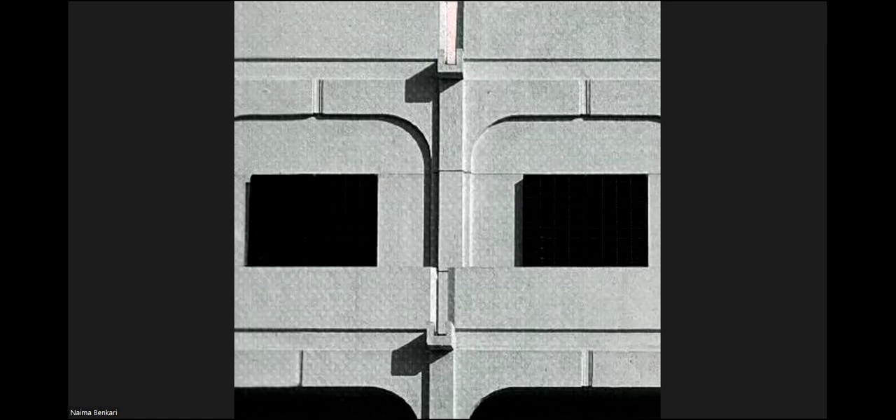Recording in progress. You can see the screen?

Yeah. Yes, it's clear. So moving on, and before I get to the basic examples, it is important to share the underlying discussions, the most important discussions, which is not easy in terms of, well, the court said find a way, but then how do you actually translate that into reality, and what are the challenges that really face such situations?

So the ancient temples that we are talking about, these are not archaeological sites. They have archaeological importance, but they're not archaeological sites. So it is difficult to freeze them. They're living monuments. They're living temples. It's difficult to freeze them in time like an archaeological site. So in reality, what are these big challenges that we're looking at?

Since these are living monuments, there is a continuation of the original function of the site, and that's really the legacy of such sites. These sites might have actually been around for even 2000 years, because there is reference in the early literature to these sites. So these have been part of the culture, the spiritual activities, the spiritual development of the entire region over centuries.

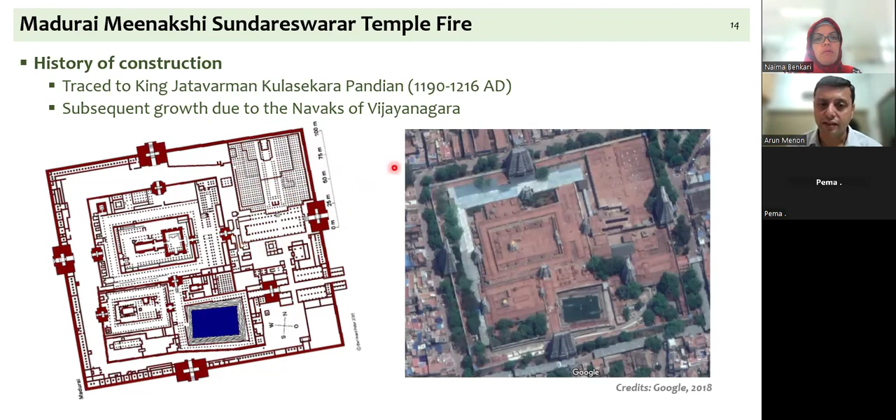I am going to focus on a structure that is, I hope you can see the pointer. You have what is called a hypostyle hall. It is called a mandapam. And this was damaged by fire. And you can see that it is sitting next to a very, very large complex. It's referred to as a 1,000-pillared hall, and it's a massive construction. It's sort of the pride of the place. It's a beautiful construction. The fire affected this location, but could have endangered this very famous construction as well. So that's the context. The name of the mandapam is Veera Vasantarayar Mandapam, in honor of a person by the name Veera Vasantarayar.

And the person was the brother of the king who was ruling at that point in time. So built in 1611. It's a hypostyle hall, and it's actually a multifunctional hall inside the temple. And today, not only this mandap, but also many other similar locations in the temple are used for multiple things. For example, a lot of shops selling products that are for the religious activity or otherwise were housed here, and the vendors would have to pay a small rent to the temple department to have their shops there.

And so you can actually see that a lot of the sculptural beauty of these spaces is obscured by the shops, but that comes from the fact that these were multifunctional spaces. So one night in this particular construction, after the shops were all closed, there are about 40 to 50 shops within this construction. What I'm showing you is a plan of the structure.

On a Friday night, since this is a temple dedicated to the goddess, Friday is an auspicious day, and on Friday night, after the affairs of the temple are completed, the shops are also closed, and there is a ritual that they carry out in each of these precincts where shops are present to remove the bad eye. They would just use a pumpkin with a camphor on it and show the shop this pumpkin and camphor, and

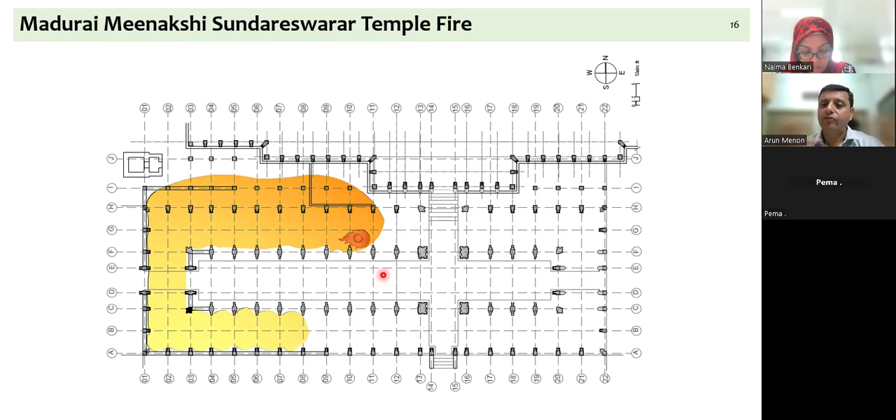And since the space was full of so much material, clothes and plastic and shops selling all this material, the fire went on for close to 5 hours. So we are talking of about 10:30 in the night to about 4 o'clock in the morning. The fire could not be curtailed. In fact, the fire department struggled to control the fire because of the amount of flammable material. And eventually, only after the collapse of the roof could the fire become less concentrated, and therefore they were able to bring down the fire here.

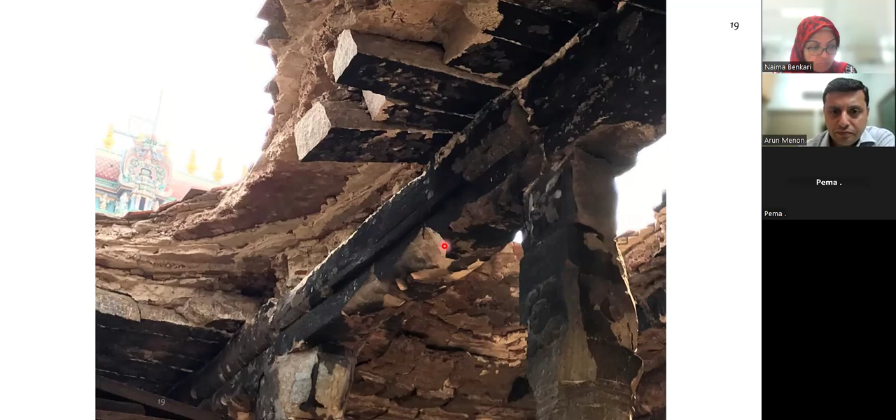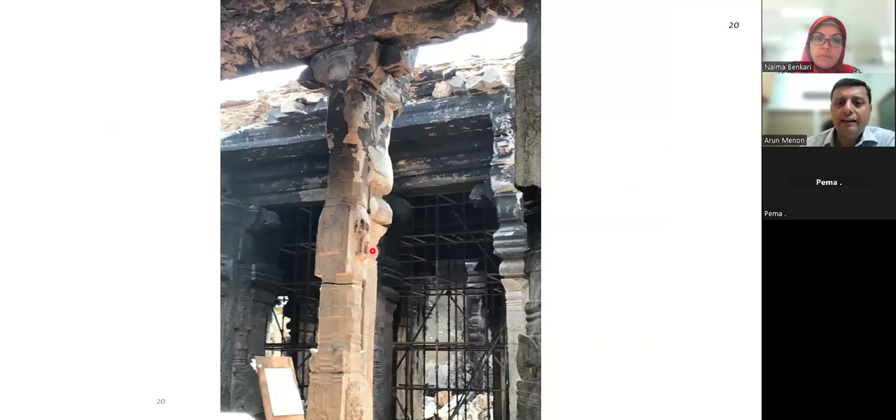Again, pictures of the day after the collapse. And you can actually see here how the roof caved in, and how stone beams and stone columns have just melted out of shape. So you're looking at material like granite, which is considered to be the strongest of the varieties of stone, that literally melted in this fire. Again, these are all heavily sculpted columns that have just rounded off because of the heat. And with the collapse of one part of the roof, there is a sudden destabilizing effect in the columns, and some of them even ended up cracking. So there was very heavy damage in this structure, which had about 115 stone pillars.

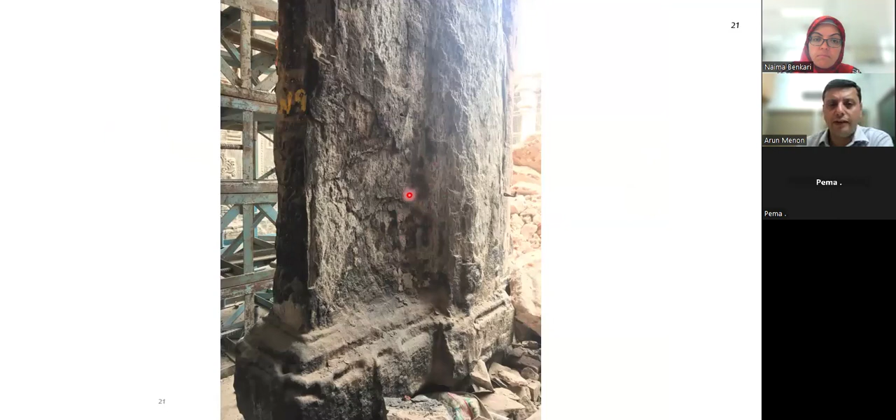One aspect when you look at these columns affected by the fire, you can actually see flaking. The stone just comes off in layers. You can actually with your hand remove layers, which means the load carrying capacity is quite seriously compromised in the stone that is in contact with the fire.

So the primary concern here was that right next to this structure was the 1,000-pillared structure, which is a sculptural marvel. So the biggest concern was if the fire-affected monument was to collapse, would it damage the 1,000-pillared monument, which would be a massive loss because the sculptural quality in the 1,000-pillared hall is spectacular.

The second thing was now you have this 115 pillared structure. What is its residual strength? Part of the roof has come down. We can see that several columns have been badly affected. But what is the status of this structure? Is it safe? Can we continue using it? And should the structure be used at all? Should we just pull down the entire historical structure and construct something new in its place? So that was the dilemma. And there was an expert committee that was called to look at it.

And there was a multidisciplinary group, as stated earlier, which was trying to understand what can be done. But the concern also was the stone in this particular structure had seen a lot of deterioration over time. Not all of the stones, but some of the pillars had seen a lot of deterioration. You can see that the sculptural quality was lost because of the surface deterioration in some of the pillars.

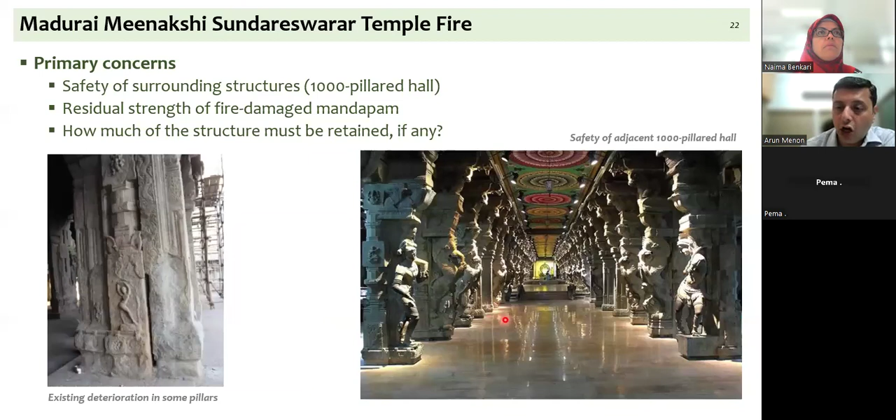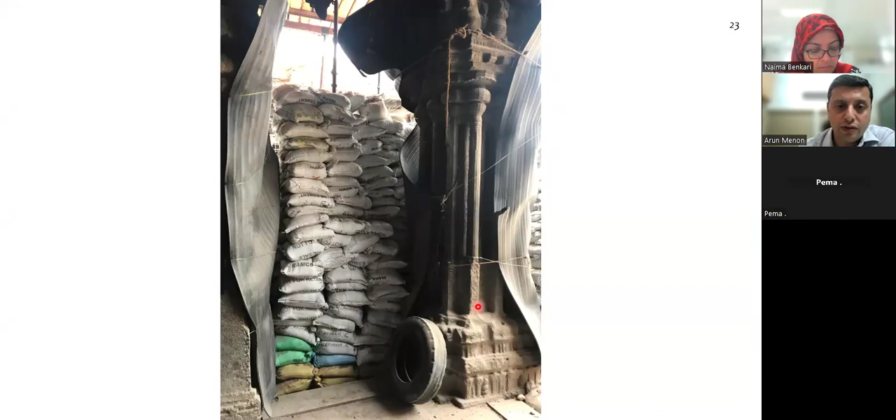And therefore, padding with sand, padding with soft material that will ensure that any untoward collapse does not cause debris and heavy material to fall onto the other sculptural structure, the other mandapam, was an important step that was taken.

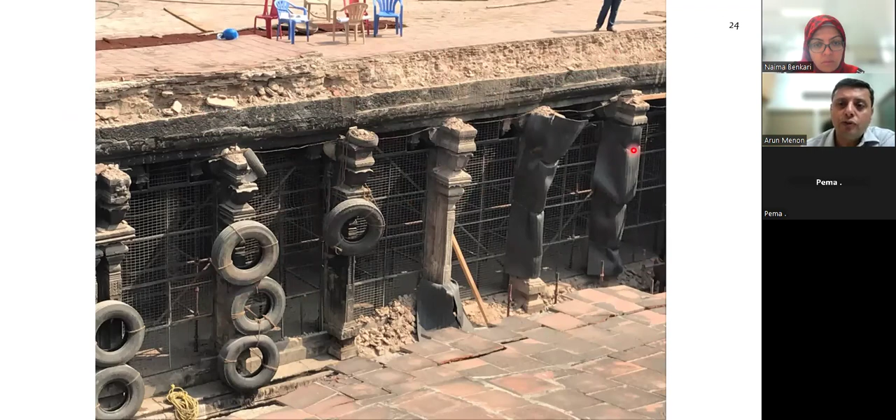And then you can see an attempt to cushion the ends of the other structure from any imminent collapse. The sizes of the columns and stone members were such that the use of heavy equipment was necessitated to even clear debris, and therefore these had to be operated at low velocity, at such low speeds that the vibrations do not get transmitted, but work could not progress without the use of heavy machinery and heavy equipment.

So at this juncture, when one of the ideas on the table was that the entire mandapam of 1611 should be torn down because it is very badly affected by the fire, the counter view was, are we sure that the entire structure is unstable? Shouldn't we do a detailed set of investigations to understand the status of damage, and then take a call on what percentage of the structure can be replaced with a new structure and how much of it can be preserved?

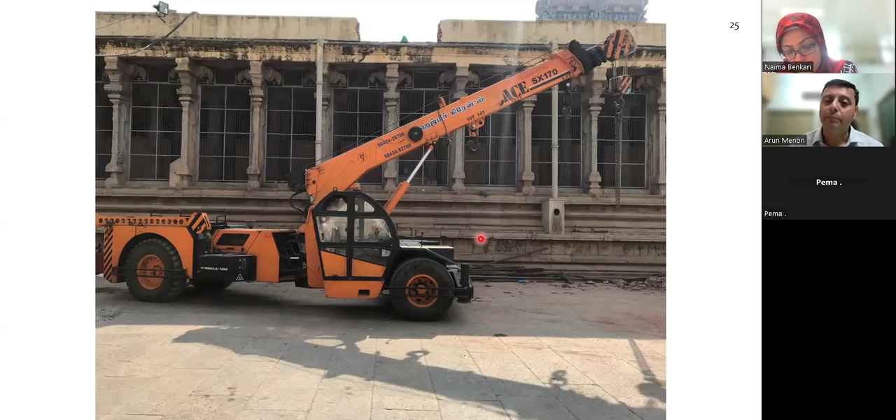Visual inspection was actually complete. The entire structure was documented, but in terms of the non-destructive testing and laboratory testing, this had to be a few samples, but representative enough. So as you can see, the non-destructive testing technique that we finally used was ultrasonic pulse velocity. The infrared thermography did not really work in this context.

Laboratory tests on extracted materials, microanalytical tests, were conducted, such as X-ray diffraction studies on the material and mercury intrusion porosimetry. We did scanning electron microscope imagery on the stones. And then we also extracted some stone cubes from columns which were damaged at different levels, and did compression testing on these extracted samples as well.

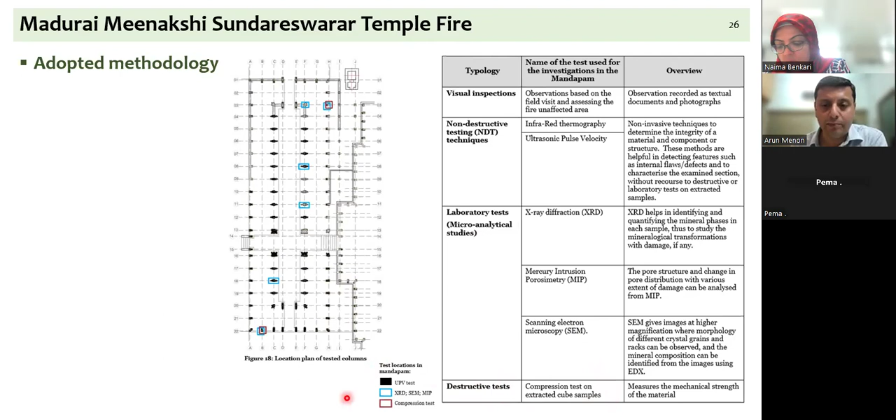So I'm showing you some slides that give you an overview. As I said, there are a lot of details in a paper, but I tried to give you an overview of what was done. So visual inspection was done for the columns. We classified them as columns with no damage, minor damage, moderate damage, major damage, and extreme damage. A column subjected to axial loads is in compression, and then it is subjected to fire.

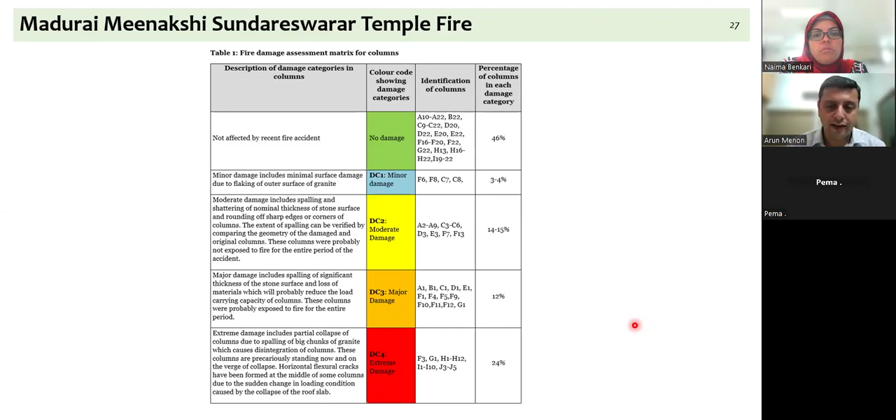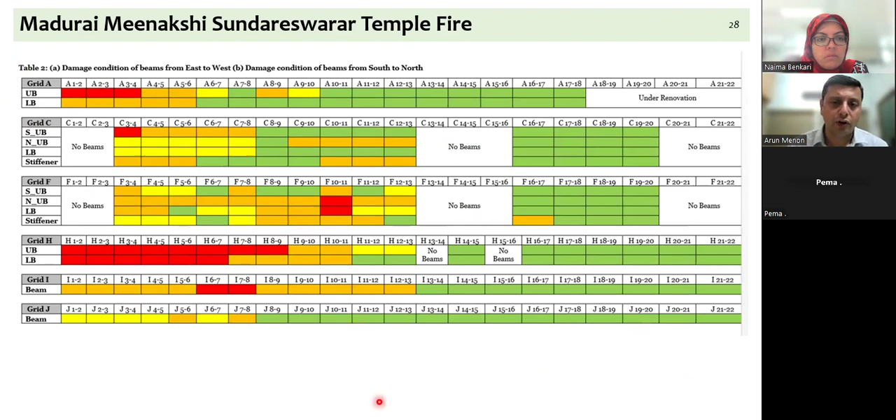Whereas a beam or a slab is in bending, and then it is subjected to fire. So the way these two members really behave is quite different. And so it was important to understand different members carefully. So we did that for columns. We did that for different beams. The red, the green, and the yellow are different stages of deterioration of these members. We did that for the slabs. You can see the kind of percentages.

But what's important is this last overall assessment based on visual inspections, which said that for the columns, you see the no damage, and then the minor, moderate, major, and extreme. So if you add up the moderate damage, major damage, and extreme damage, you can see that we are close to 50% of the columns that are in moderate, major to extreme damage.

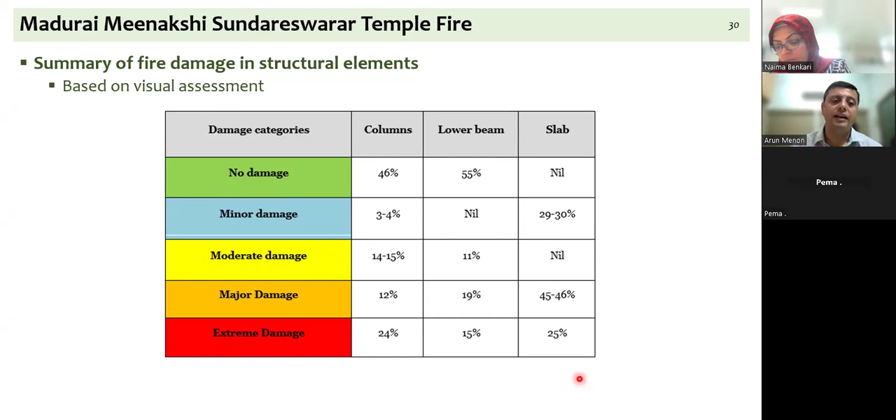If you look at the beams, we are at about 45% of the beams that are in moderate to extreme damage. If you look at the slabs, we are at about 70% of the slabs that are in moderate to extreme damage condition. So this gave us an idea from only visual inspections that about 50% of this structure is in really bad condition and may not be in a position to be reused.

We then carried out multiple tests. We did some ultrasonic pulse velocity tests. The ultrasonic pulse velocity test showed, very surprisingly, that the stone columns which were affected by fire and the stone columns not affected by fire did not show a big difference in the velocity of the sonic waves. And that was a little counterintuitive. If you actually see the fire unaffected and the fire affected columns, the numbers, which are really the wave velocities, are not very different. So this was a little bit of a surprise for us.

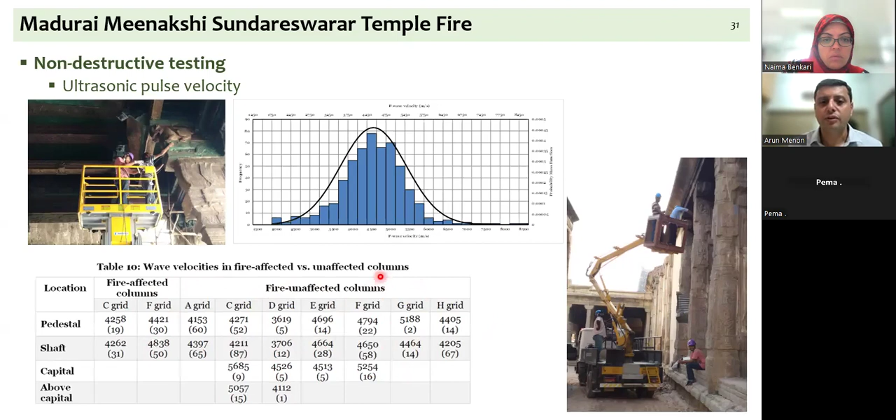So we went ahead and did testing; some columns had collapsed, so we could take samples from them. We took samples from different parts of such affected members, and we did compression tests in the laboratory. And we realized that, strictly speaking, the compressive strength of this granite was not lost in some of these columns. If we were to take a column that was very badly affected by fire, but take the core of the stone and check its compressive strength, it was really not compromised.

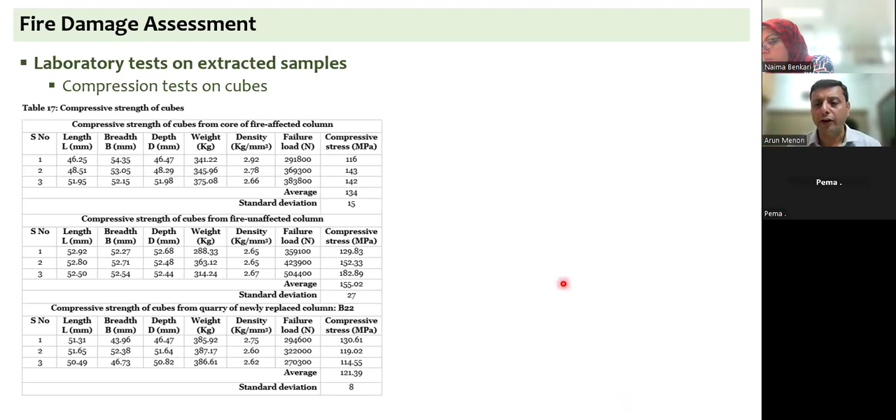But then the outer layers, as I was mentioning, were flaking. And so we had to be careful that the section of the columns was reducing, and you could have buckling of these columns. With that point in mind, the compressive strength of the columns was really not compromised. So this is something that we were able to look at.

We then, as I said, for the microanalytical studies, collected samples from different locations in the columns. We looked at columns that are not affected at all, columns that are affected in a minor way, major way, extreme way. And I was mentioning some of the columns were already weathered before the fire, so we took some samples from that. We took some samples of new granite as well, so that we are able to compare the microscopic condition of the samples. The microanalytical studies were very interesting.

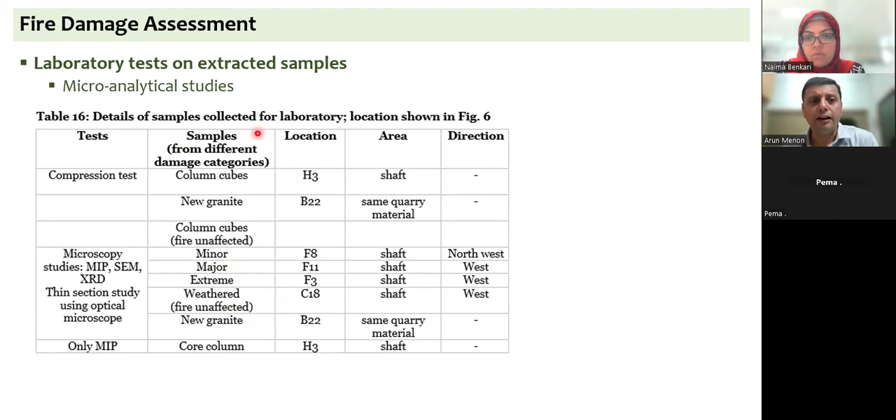We were able to see how the fire was actually... this particular test called mercury intrusion porosimetry. Yes, I'll do same as before.

So in this particular test called mercury intrusion porosimetry, mercury is, under pressure, filled into the pores of a sample of granite. And you take measurements of how much mercury is being used up. Those measurements can give you an idea of the pore size distribution and the sizes of pores. And it was very interesting to see how the fire had actually affected the outer layers of the stone quite significantly, whereas the inner layers of the stone were more or less conserved.

Small pores were beginning to join larger pores, and there was a change in the micro pore structure in the outer portions of the stone, not so much in the inner portions of the stone. So we were able to see that the columns that were possibly affected in a minor way or in a moderate way still had good core strength, which we can depend on. So that was some sort of an insight we were able to get. And in certain cases, the pore size was also changing because of expansion of some materials.

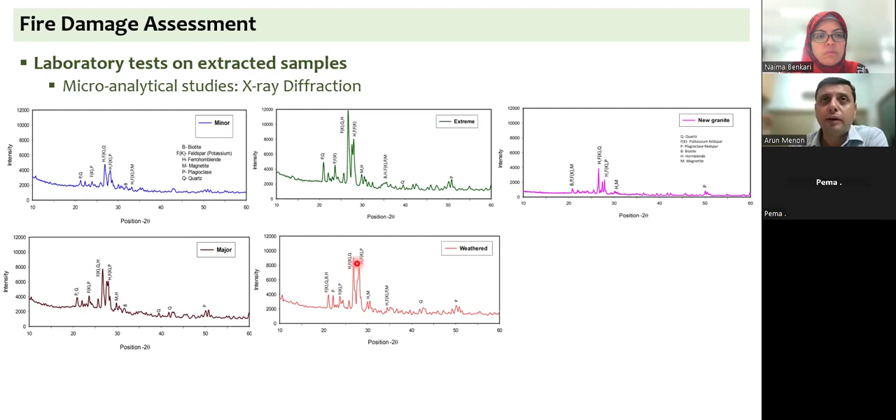So this was some insight we were able to get in different locations of the stone, in different stages of the fire damage of the stone itself. We then did X-ray diffraction studies to understand the type of crystals and minerals that are forming in the stones affected by fire. But here, really what was happening is the crystal forms were slightly changing, and that was due to expansion due to fire, and that was being captured, and that could also explain why the porosity was getting affected in some parts of the stone.

What was interesting was to look at these scanning electron microscope images, and in the scanning electron microscope images, we started seeing depositions of ferric oxide, which was an interesting point to be noted, that ferrous oxide is what you have in granite as the mineral, but the conversion of ferrous oxide to ferric oxide by oxidation in the presence of fire was actually happening, and that happens at about 600 degrees centigrade.

So there was evidence of presence of ferric oxide in many of these samples, which gave us the evidence of many locations which were from moderate to extreme damage conditions of having reached at least 600 degrees or higher. And that was important to understand which were the more affected columns and which were the less affected columns, and few mineral forms that were typically seen because of this enlargement of the quartz as well.

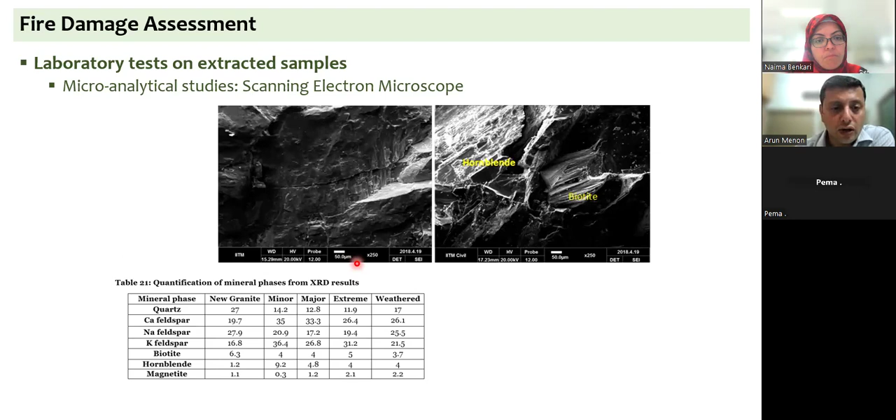These scanning electron microscope images plus the XRD and the other tests that were conducted, the non-destructive tests, along with the tests on the cubes, gave us some fundamental inferences. And I'll just take you through some of these inferences. From the visual assessment, we were able to arrive at the fact that about 54% of these pillars were damaged, and many of them were in the moderate damage to extreme damage category. So about 50% of the structure is in a bad condition, was clear.

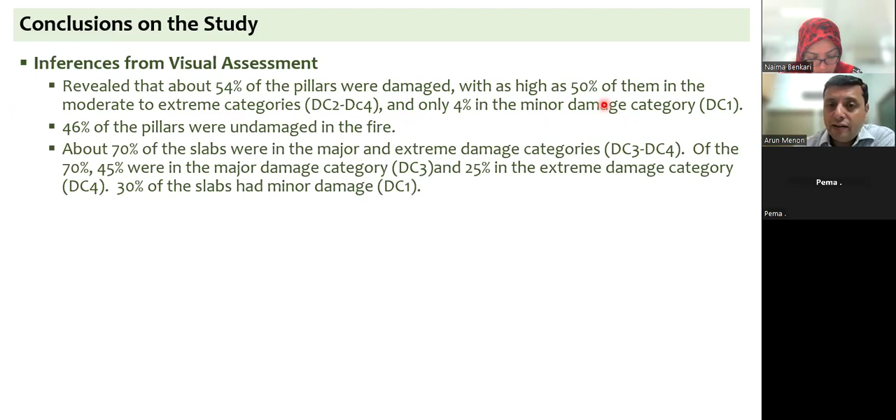About 46% of the pillars were undamaged in the fire, and about 70% slabs were in major and extreme damage condition, whereas in beams, about 45% was in extreme to moderate damage categories.

Now, from the non-destructive tests, we did not see any reduction in the sonic waves in the fire-affected pillars. We expected it to have some changes in the sonic wave velocities, but this was not happening. And that was really because of the small sizes of pores that we're talking of in granite, and sonic velocity not being able to discern the difference between pores that are affected and pores that are not affected.

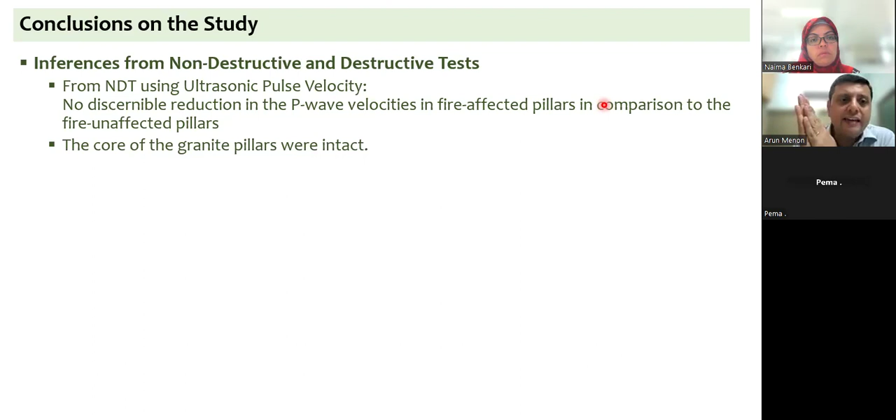But it was very clear that this was coming across because the core of the granite pillars were intact. It was really the exterior layers that were badly affected by the fire. And given the low porosity, the exterior layers were getting damaged by flaking. But the core of the granite pillars, in most cases, were intact. And the compressive strength tests also showed that the core strength was actually conserved, and this was an important outcome.

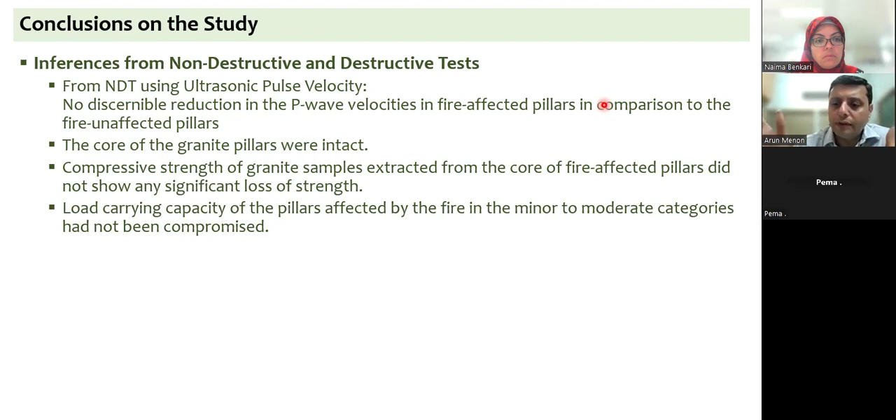Because these pillars had not reduced in cross section in about 50% of the cases, the load carrying capacity was really not affected in almost 50% of the structure. From the microanalytical studies, we were able to see that the mineralogy really did not change. There was change of form of some of these materials like quartz, and that brought in some volume changes, and these volume changes caused some cracking, and that's why we were seeing some porosity changes as well.

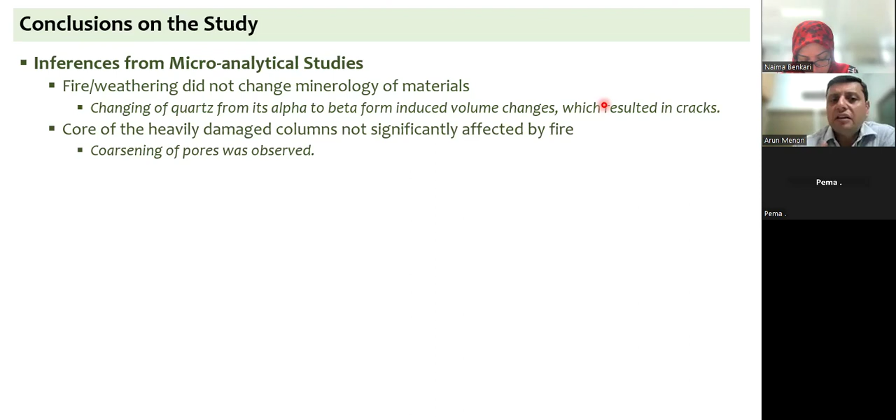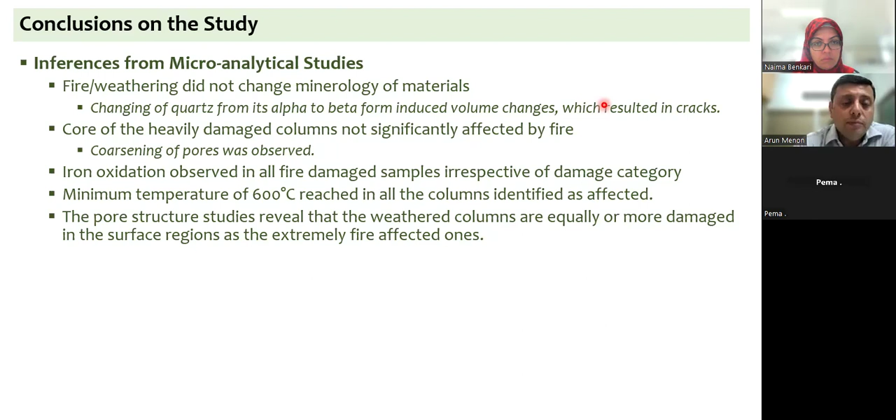Again, in the core of the heavily damaged columns, very slight change due to the fire was observed. But we had seen oxidation of iron, as I said, ferrous to ferric oxide, in all the fire damage samples, irrespective of the damage category, meaning that a minimum temperature of 600 degrees was reached in all the columns in the site. And as I said, we were also examining the weathered columns with the extreme fire-affected columns. The weathered columns and the fire-affected columns are actually comparable in terms of their damage.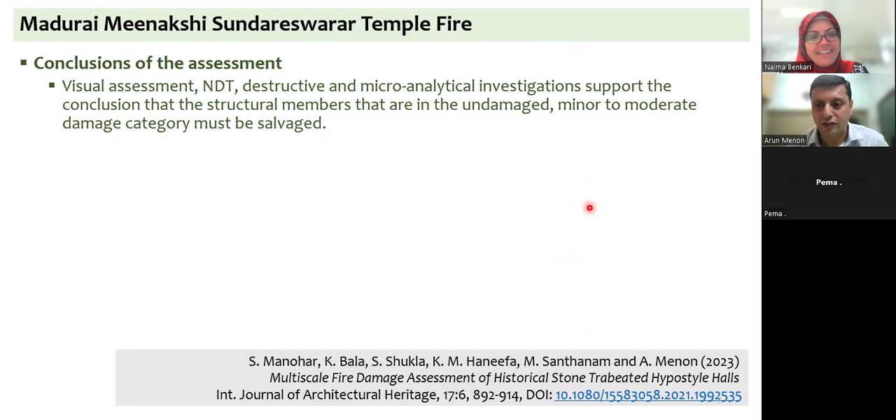So final conclusion, maybe I will stop and then close this discussion as I begin in the next. Is that okay? And how are we doing in terms of time? Yes, it's okay, and it's fascinating. I'm really very impressed by what I'm learning today. Within the next 20 minutes or so, I'll conclude the rest of the discussion. Yeah. Okay. Thank you. See you later.